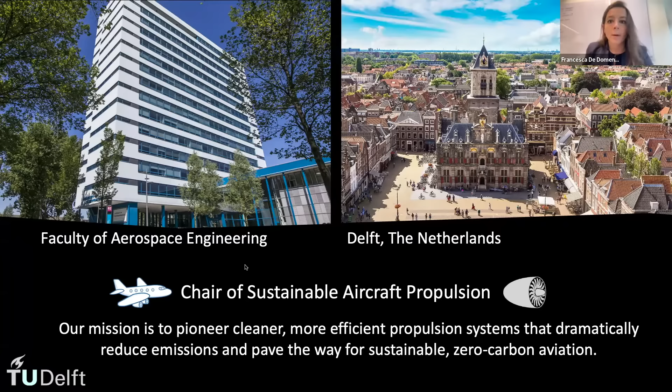Now, I'll give still a bit of background for the background, and I'll dig a bit deeper within net zero emissions in aviation, which is the topic I'm focusing my research on.

Most likely you have seen a similar graph many times. This graph shows the carbon dioxide emissions from flights within the EU+ region, and this is the projection from 2018 to 2050, taken from the report Destination 2050 of EU. What we see here is the goal: for us to get to zero carbon dioxide emissions in 2050. And here are the solutions that are envisioned for the future.

So not only improving technologies, but also operations, sustainable aviation fuels, and hydrogen. Hydrogen, as you can see from this projection, has a very big role in achieving this net zero in aviation. However, as you can see from this graph, we only see hydrogen being added to the picture in the system from 2035. The reason, as most of you already know, and I will further expand during the talk, is really the different properties of hydrogen with respect to what we use today. Nowadays, we mainly fly using kerosene, jet A fuel types, and a very small blend percentage of SAF.

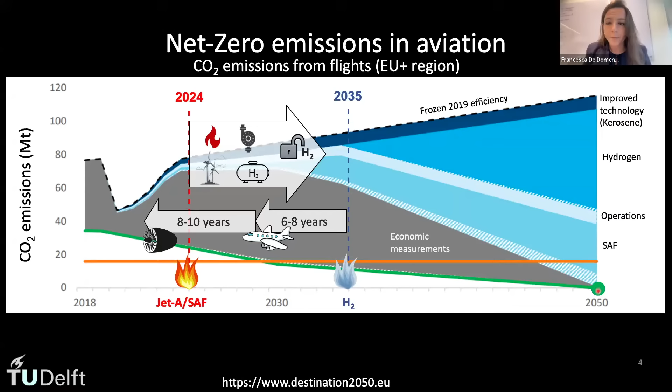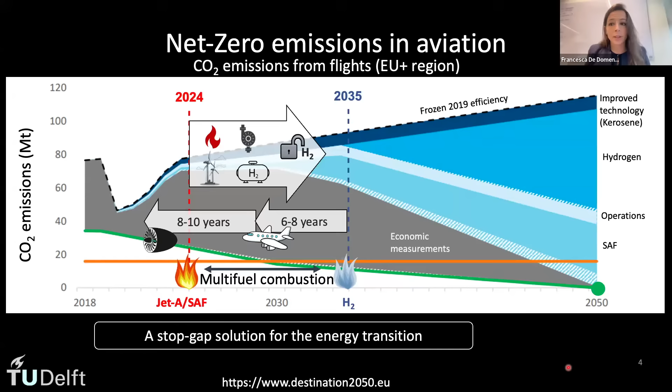One way could be using some stopgap solution, such as multi-fuel combustion. This is the first time I introduce it, and I'd like to explain the concept. The idea of multi-fuel combustion is having a system that synergically uses kerosene as well as hydrogen in order to speed up the introduction of hydrogen within the aviation framework, while we mature our understanding of hydrogen combustion as well as the technologies needed for delivering hydrogen at the airport and carrying it on the airplanes.

Having given this picture, I'd like to provide an outline of the talk. In the first part, I'll go through something some of you might already know, but I'll recap the differences in combustion properties between hydrogen and hydrocarbon fuels.

Then, based on that, I'll introduce the multi-fuel combustion concept and how we are developing it here at TU Delft. In particular, I will present the results of 2 burners that we are using. To be honest, it's the same baseline burner, but this will be clear later on.

So what I will discuss is how we are using multi-fuel combustion here at Delft, how we are developing systems. We started with a multi-fuel methane-hydrogen burner, which we call the APPU burner, and then we retrofit this burner to also include kerosene, within the project HOPE.

Finally, I will discuss the next steps of this research and of this implementation of multi-fuel combustion, and then I will provide some conclusions and outlook.

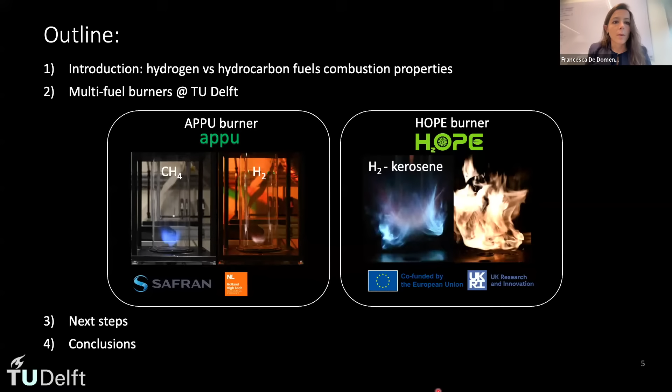Okay, let's start then. Here is a small recap of what I discussed before. How will airplanes look in 2050? This is providing just one possible scenario, because we still need to make the innovations necessary to introduce some of these planes.

So what I want you to take away from this slide is that in 2050, if we want to decarbonize, we will see different shapes and sizes of planes based on the emissions that we will have. Hydrogen most likely has a very big importance in the decarbonization of short to medium range aircraft, while we keep sustainable aviation fuels for the long range.

Another thing I'd like to point out from this scenario is that sustainable aviation fuels are the only ones we could potentially use in current airplanes. But batteries, fuel cells, and hydrogen combustion are still planes that need to be developed. So there's quite a lot of road, discoveries, and technological advancement that needs to be made in order for us to get there.

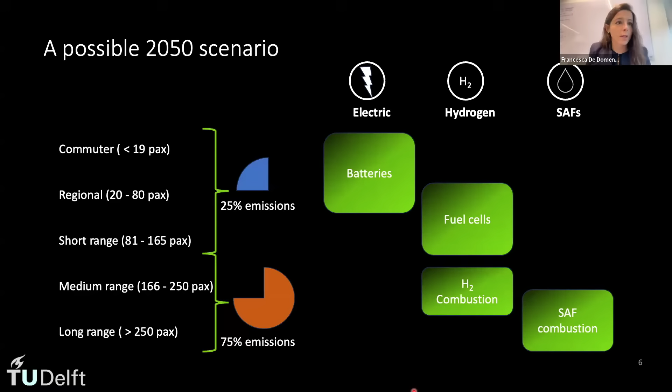So one might wonder, okay, why hydrogen then? Why not just stick with kerosene or sustainable aviation fuels if it's so difficult? But the reason is that we simply cannot just use sustainable aviation fuels for decarbonization. Hydrogen has an enormous potential to decarbonize the aviation system.

First of all, it has zero emission potential and allows for long-term sustainability. It has unique properties, being extremely light and having a very large amount of energy per unit mass. It can be used in a versatile way, in different propulsion systems, and it is available in nature.

This means that as we develop the systems for producing hydrogen, the cost of production will decline, whereas for producing sustainable aviation fuels, there is either not enough feedstock or base material that can be used to make them, or the cost of production is extremely high, so we cannot think of using them to fully decarbonize the entire aviation sector.

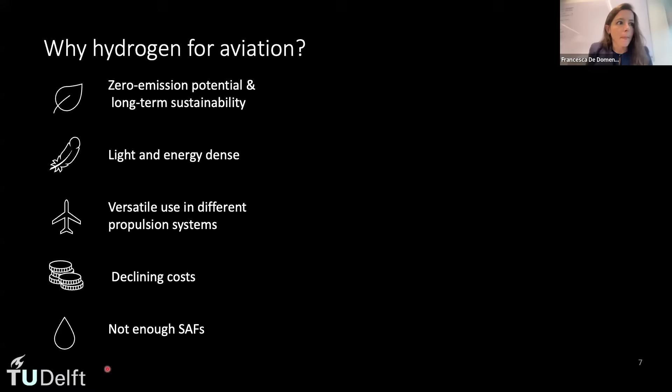So from this, it clearly emerges that hydrogen is really offering a transformative way for aviation. However, there are still big challenges that we need to manage in combustion dynamics, which is what we study, storage, infrastructure, and safety.

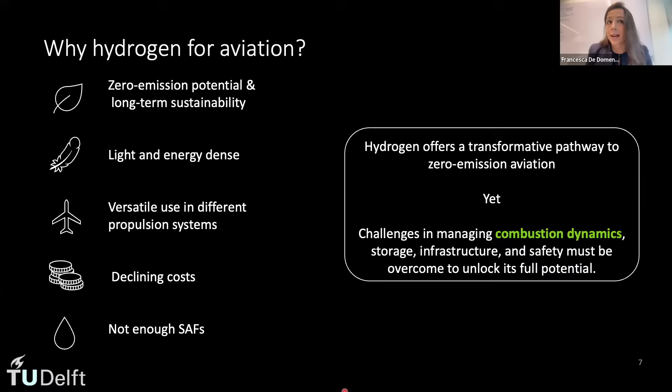Now from the point of view of combustion, hydrogen cannot really be considered a drop-in fuel. In fact, it has very different properties with respect to hydrocarbons. I'll be quick on this since you've probably seen it many times, but it is much lighter with respect to hydrocarbons, both methane and kerosene, has much higher flammability limits, much faster flame speed, and relatively higher adiabatic flame temperature.

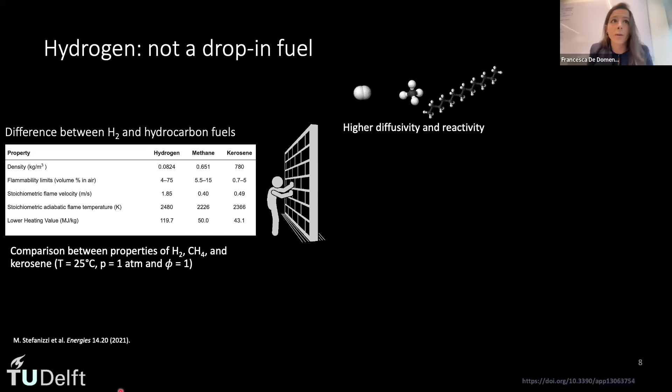This really creates some obstacles because the higher diffusivity and reactivity makes hydrogen flames more prone to flame instabilities. Higher flame speed means a higher risk of flashback, which is detrimental if you think about an aviation engine where you want to be safe 100%.

And also the higher flame temperature might increase the amount of NOx that is produced, which is something we don't want, because we don't want to resolve the CO2 problem and then end up having high NOx problems.

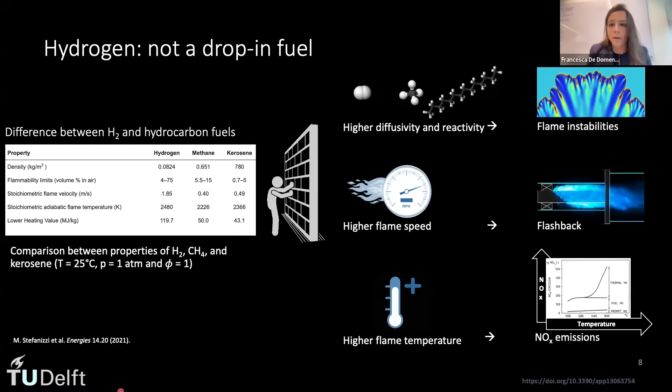So with all of this, we see that there's quite a lot of work for us in order to bring hydrogen within the aviation sector in a suitable way, to have safe, green, and efficient airplanes. Multi-fuel combustion can really act here as a stopgap solution to speed up the introduction of hydrogen within aviation.

In fact, if you can use simultaneously both hydrogen and kerosene, this system would allow you to have more flexibility. It really gives you the flexibility of being able to use both hydrogen and hydrocarbons within various applications.

It has higher adaptability, meaning that you can think about retrofitting the current engines by adding hydrogen lines, rather than fully redeveloping the engine for hydrogen-only solutions.

It will, of course, have the benefits of reducing emissions, not only carbon dioxide but also NOx and soot, as I will show later on. And then it can really ensure security of supply, because you don't rely on hydrogen only, which might not be available at the airport where you land.

And also it's cost effective, because if you're not forced to use 100% hydrogen, at a time when hydrogen cost and infrastructure are still being developed, the use of diverse fuels helps reduce the dependency on expensive or scarce options.

So we really see multi-fuel as a stopgap solution towards zero emissions, which will allow the adoption of hydrogen while supporting decarbonization goals, both for aviation and land-based power applications.

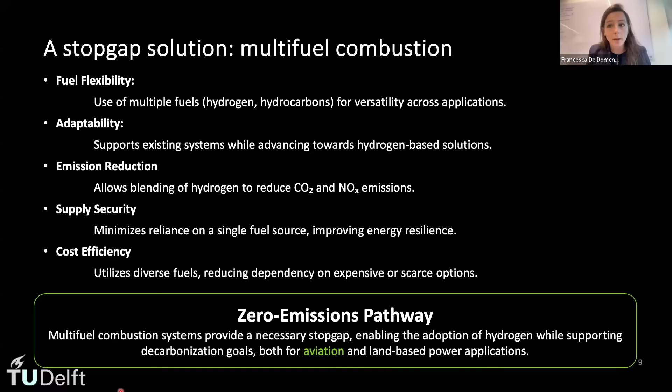So of course there's been some previous work on multi-fuel combustion with hydrogen and kerosene. As I mentioned, we're looking at applications for aviation, and therefore kerosene is the other fuel with which hydrogen would work. But overall, relatively, there hasn't been that much interest, really, because hydrogen was never really put in the picture as a fuel that could be used for aviation.

So if we take a look at the literature and at what was done in previous studies on multi-fuel systems that could work synergistically with hydrogen and kerosene, the first experiment we found is from the 80s, done by Hiroyasu in Japan, who developed a hybrid fuel nozzle that could use liquid kerosene together with gaseous hydrogen, going from 100% hydrogen to 100% kerosene.

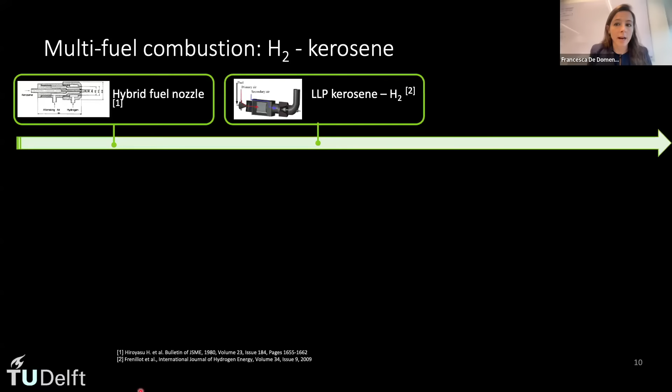Then there have been some studies on lean premix prevaporized kerosene with hydrogen, meaning that kerosene is not sprayed as it would in an aero engine, but is instead prevaporized and then injected into the chamber and mixed with the hydrogen. This, of course, has some benefits, because it means both fuels are gaseous, and the combustion is slightly easier to deal with rather than having two-phase fuels.

And finally, there is also the LEAF burner, which was developed at ETH Zurich, which can run on both hydrogen and kerosene, and with a mixture of the two, but it really requires a design that is not conventional.

So it's a novel combustion concept with a different injection system. While experimental work is quite scarce, there's some work that could be found in terms of CFD simulations studying how hydrogen and kerosene would interact with each other, and also some chemical reactor network studies analyzing the properties of multi-fuel hydrogen-kerosene systems.

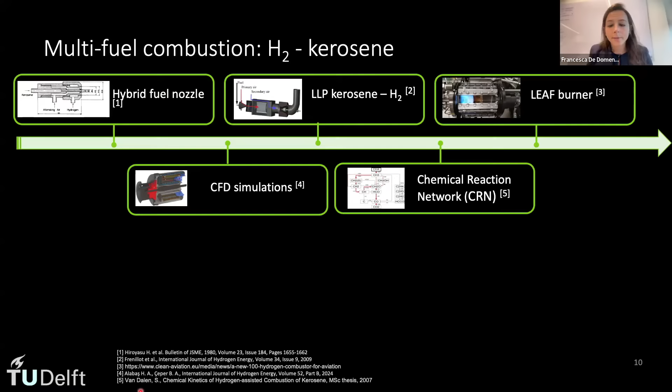And this is all the literature up until 2020. But recently there's quite a bit more interest in multi-fuel combustion, really for the potential that multi-fuel combustion offers as a key enabler for the advent of hydrogen in aviation. Here I listed 3 of the main projects that are now running on this, or that I'm aware of.

There is a Clean Aviation project looking at the introduction of hydrogen within aviation, aiming to develop and test a multi-fuel aircraft engine which Fokker would like to fly by 2035. Fokker is a Dutch-based aircraft company that has pledged to fly a multi-fuel plane by 2035.

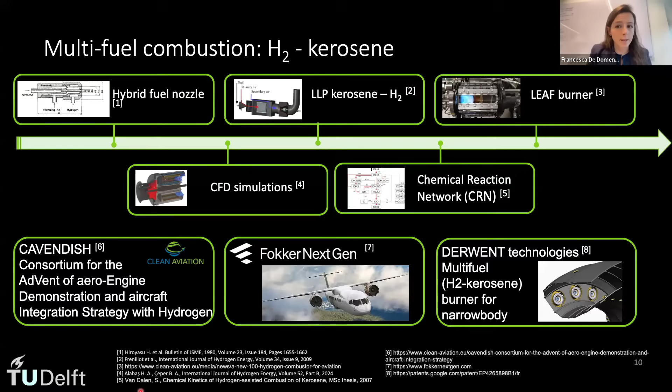And Derwent Technologies is a British-based company which is developing a multi-fuel hydrogen-kerosene burner for narrow body aircraft. This has all happened after 2020, so really recent interest with this concept of multi-fuel combustion.

And within this, I'd really like to highlight the project HOPE we are working on. HOPE is a project we are working on here at TU Delft, and HOPE stands for Hydrogen Optimized Multi-Fuel Propulsion System for Clean and Silent Aircraft.

It's a Horizon Europe project that was funded in 2022, in a call towards a silent and ultra-low local air pollution aircraft. For HOPE, we aim to develop a novel aircraft, a multi-fuel ultra-high bypass ratio turbofan engine. So the multi-fuel aircraft I've been talking about, where the kerosene is stored within the wings and the hydrogen is stored at the tail.

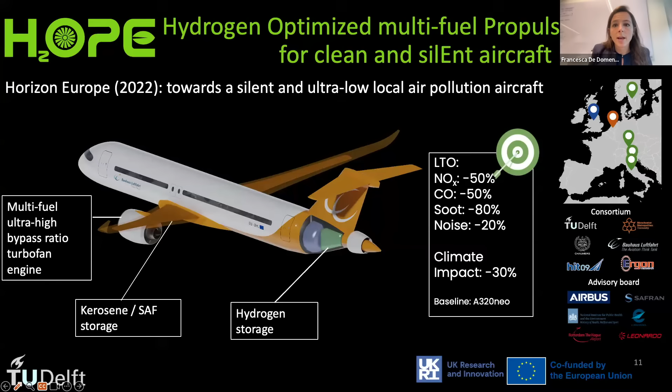It's a European project, TU Delft is leading, and then 5 partners across Europe are collaborating with us within this project. As I mentioned, at TU Delft we are really focusing on the development of the multi-fuel ultra-high bypass ratio turbofan engine, and in particular demonstrating the advantages of multi-fuel combustion in our lab.

Now, before coming into what we are doing, I'd like to provide a bit more context on the advantages of multi-fuel combustion in terms of combustion properties. Previous studies demonstrated that not only do you reduce carbon dioxide, you also reduce CO, soot, and thermoacoustic instabilities. And by adding hydrogen to kerosene, you alter the NOx pathways with the potential for reduction of NOx.

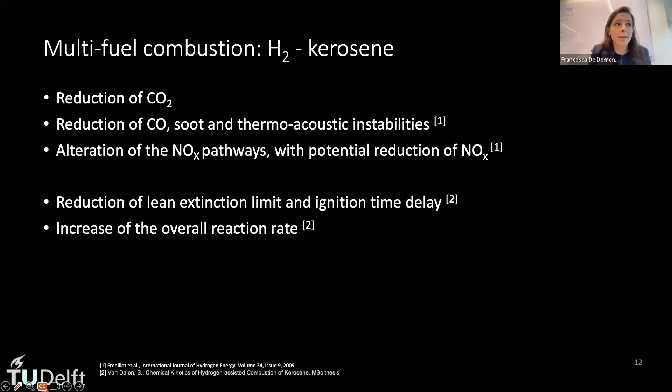Furthermore, you reduce the lean extinction limit and ignition time delay, and also increase the overall reaction rate. And finally, because you don't have to carry all the hydrogen, you also have the benefit of reducing the hydrogen tank size, which is advantageous because it means you don't have to fully change the shape of the airplanes.

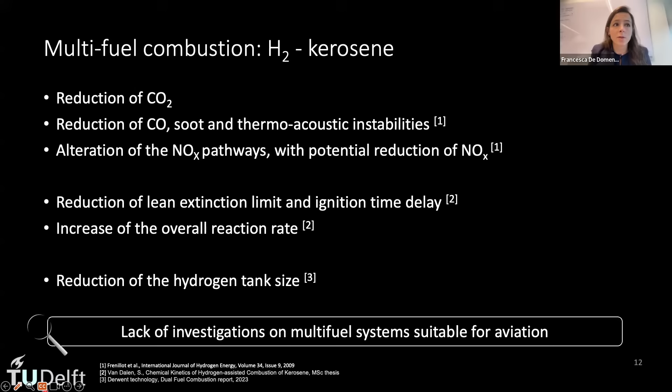But the issue is that while all of this was mainly demonstrated from CFD or chemical reaction network investigations, there is really a lack of experimental investigations on multi-fuel systems suitable for aviation. And that's where really our research comes in.

So our goal is to efficiently combine hydrogen and kerosene to boost performance while minimizing emissions, and we will do this experimentally. We want to develop a system in the lab with which we are able to investigate and understand the dynamics of hydrogen and hydrocarbon blends, advanced diagnostics techniques for multi-fuel combustion - extremely important considering the complexity of the physics and flows involved - and the practical implementation in aviation, to provide a roadmap for introducing such technologies within the aviation sector.

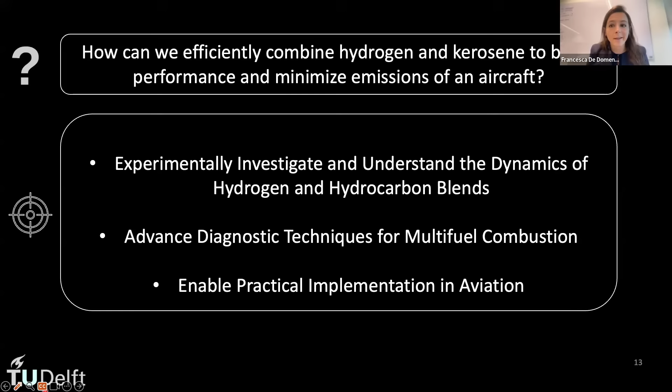Now, after this introduction, I'd like to bring you to the lab and show you how we are tackling the problem with the two burners I discussed previously. I'll start with the swirl-stabilized hydrogen-methane burner, for two reasons: historically, because this is the first swirl-stabilized burner that we tested with hydrogen, but also because this is really the baseline burner that we have modified for the addition of kerosene.

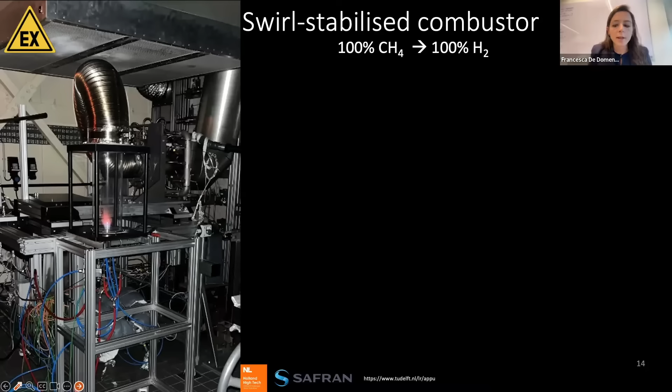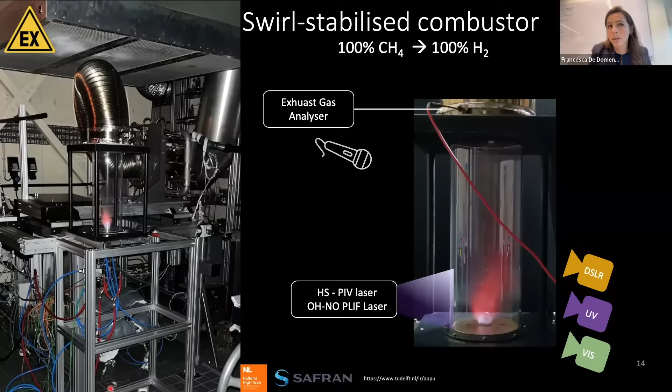As diagnostics that we make on this flame, we have a high-speed PIV, we have OH and NO PLIF, and of course chemiluminescence and visual images of the flame, as well as an exhaust gas analyzer and a far-field microphone to measure the acoustic signature of the system.

Now, a bit more about the injection strategy, because as most of you that work in the lab know, it is very difficult to stabilize both a hydrogen and a methane flame on the same injector, due to the very different flame speed that the two have. So I'd like to show you how we do it in our burner.

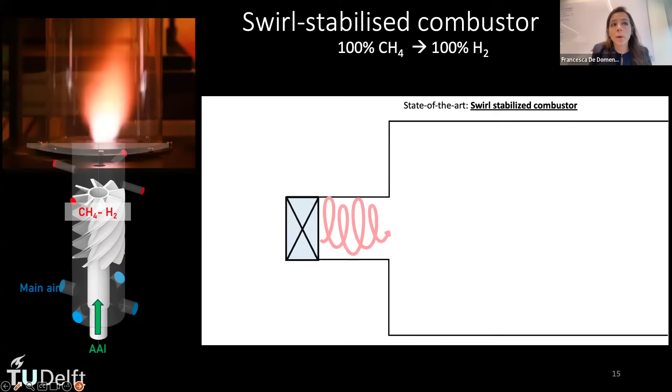First of all, as I mentioned, this is a swirl stabilized combustor. We have an axial swirler feeding into the combustion chamber. What happens is that if you have a sufficiently high swirl number, you generate a flow pattern with an inner recirculation zone here, and two outer recirculations, a toroidal outer recirculation zone on the side, with a stagnation point here.

In our case, the system is practically, or technically, premixed, meaning that we do not have fuel and oxidizer mixing in the swirler, but for safety reasons we try to inject fuel as late as possible, but early enough to still have a decent level of mixedness of the fuel within the combustion chamber.

Therefore, we inject the fuel right downstream of the swirler, as you can see here, and it corresponds to these four injection ports here on the swirler design.

If it was a methane flame, the methane flame would nicely sit and stabilize there, as you see it here. So most likely we would not encounter problems of flashback in most cases. However, what happens with hydrogen is that, because it has a much higher laminar burning velocity, most likely the flame would flash back within the injector.

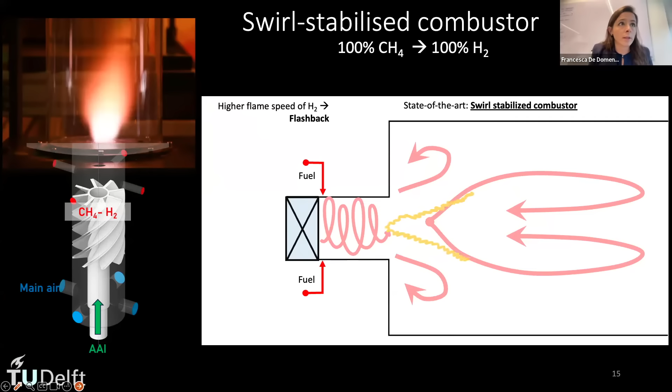In order to avoid the flashback, we use the concept of axial air injection that was introduced in 2015 at TU Berlin, which means there is a central jet of axial air injection used to compensate the velocity deficit generated by the high burning velocity of the hydrogen.

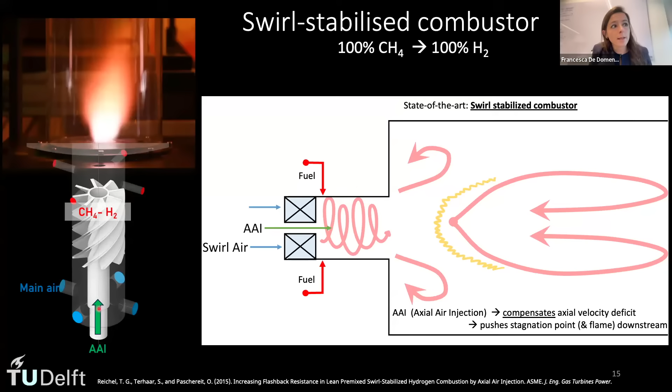This axial air injection manages to push the flame downstream and stabilize the hydrogen flames, avoiding flashback. This corresponds to the central jet of air here that you see in the injector.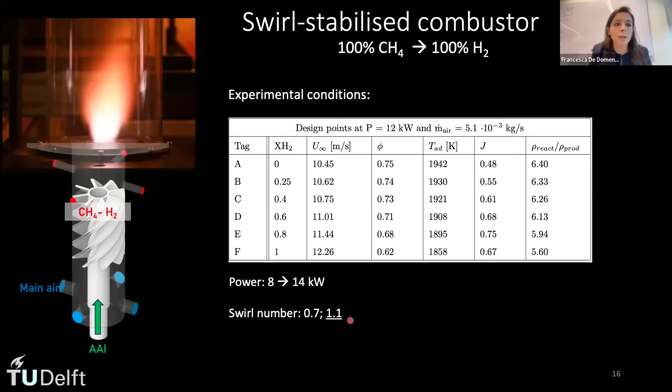In terms of power, within our analysis we mainly tested the burner from 8 to 14 kilowatts, and we have two swirlers with two different swirl numbers. But for the results I'm going to show now, the swirl number we use is the one with swirl number 1.1.

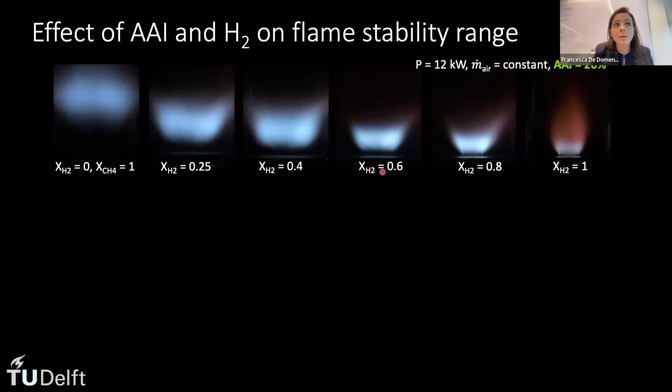Now here's how the flame looks going from 100% methane, this flame here, to 100% hydrogen, which is the flame here. As you can expect from my previous description, and because of the much faster laminar flame speed of hydrogen, you see that the flame gets closer. The more hydrogen we add, the closer the flame gets to the injector and the more compact it gets.

If we take a look at the stability map of this burner, we see that the axial air injection helps us achieve continuous operation from 100% methane, represented here in this stability map, to 100% hydrogen, here. While instead, if we do not use axial air injection, as anticipated, it is not possible to achieve stable combustion from 100% methane to 100% hydrogen, but at equivalence ratio 0.6, the multi-fuel flame starts to flash back.

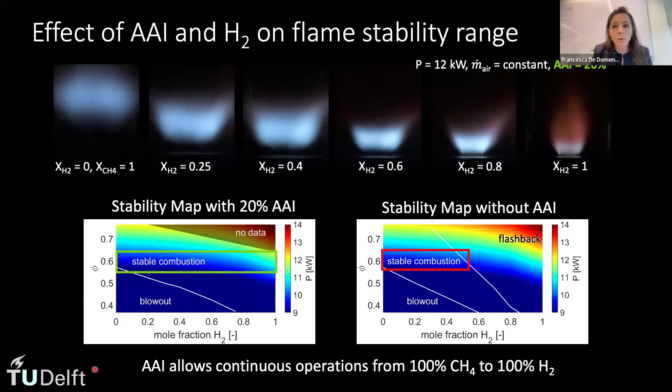This is a big advantage, being able to use the same injector burner for two different flames with two different fuels. But of course, this has some drawbacks, which can be seen in the OH star chemiluminescence data and high-speed PIV data that were taken.

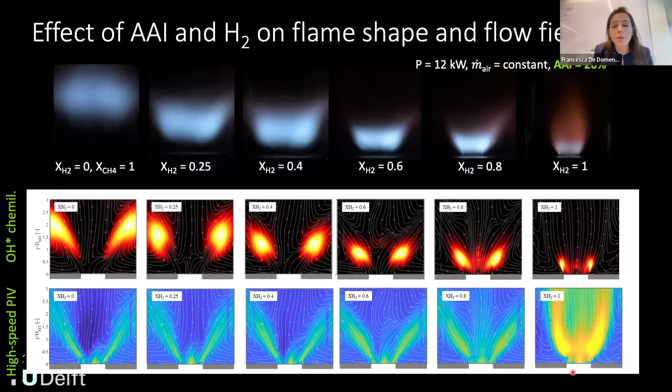Without going into all the cases, I'd like to point out that from the streamlines, you can see the flame at 100% methane has the nicest swirl structure you'd expect, with an outer recirculation zone and an inner recirculation zone. But the more hydrogen we add, the more we start losing the inner recirculation zone, until at 80% hydrogen we no longer have it, and at 100% hydrogen the flame is mainly behaving as a jet flame, not as a swirl stabilized flame. So we keep the outer recirculation zone, but we miss the inner recirculation zone within this system.

If we take a look at the two extreme cases, 100% methane without axial air injection shows a nice swirling flame, both from the PLIF images and the PIV. Instead, with 100% hydrogen, the flame, as anticipated, has more the shape of a jet flame rather than a nicely swirl stabilized flame.

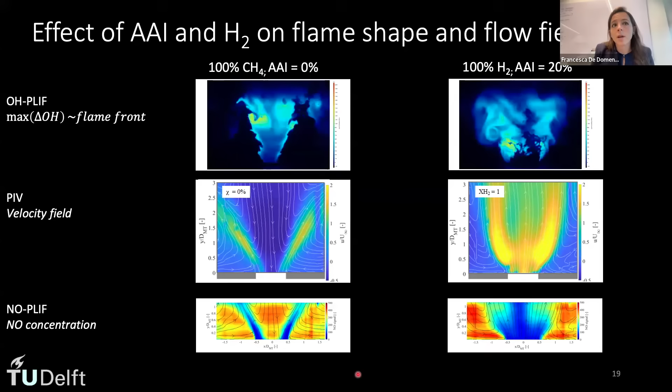What we also see is that the NOx, one of the main issues with hydrogen, is very different. For the methane flame, we have, as expected, production of NOx in both the inner and outer recirculation zones. For the hydrogen flames, the inner recirculation zone is not there anymore, but we have a much higher production in the outer recirculation zone.

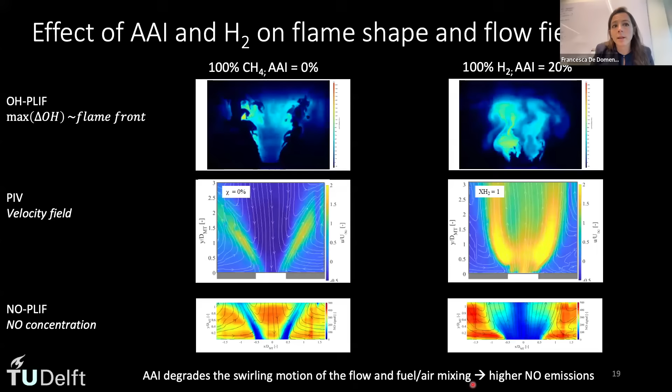So overall, if we take a look at a scan, we can say that axial air injection degrades the swirling motion of the flow and the fuel-air mixing, which eventually results in higher NOx emissions, as we can see here.

If we take measurements from the exhaust gas analyzer, we see that by increasing the hydrogen mole fraction, the amount of carbon dioxide reduces until we don't have it anymore at zero methane in the mixture. However, the NO measured by the gas analyzer tends to increase, which is of course something we don't want.

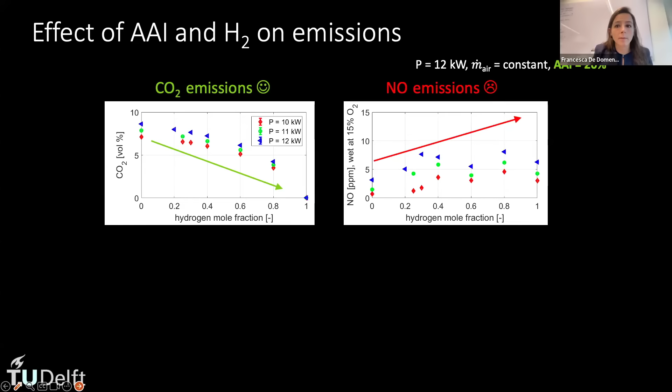However, from these results, particularly the exhaust gas analyzer, we cannot capture very well how both the axial air injection and hydrogen addition are acting on NOx emissions, because these are two different phenomena. The first is a non-swirling flow within the swirler, and the other is the addition of hydrogen, which burns at much higher temperature, making the system more prone to producing thermal NOx.

So what we did was go to the lab and run three campaigns to look at the effects of both axial air injection and hydrogen on the NOx emissions of the burner. In the first test, we kept all quantities constant and only increased the axial air injection in the system.

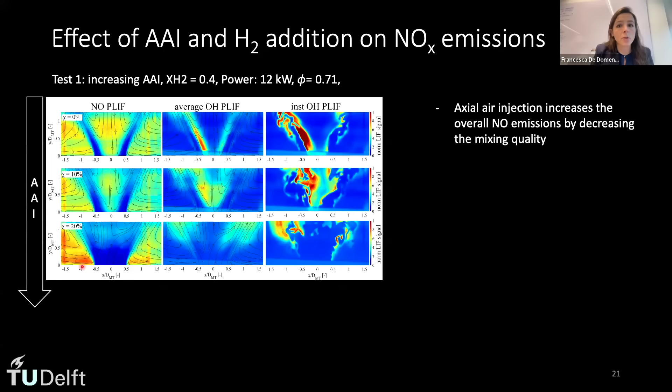You can see here the NO PLIF and OH PLIF results from the burner. By increasing the axial air injection from 0% to 20%, we start seeing a higher production of NO in the outer recirculation zone. This tells us that axial air injection increases overall NO emissions by decreasing the mixing quality, meaning the fuel and oxidizer mix worse within the mixing tube, which corresponds to a higher NOx level produced by the burner.

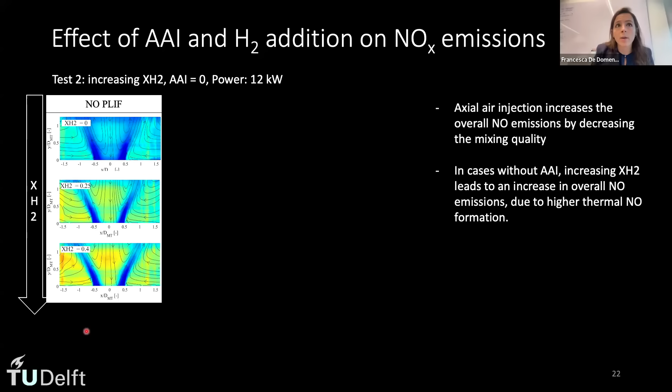The second test was increasing the hydrogen content while keeping the power and axial air injection constant. Here we have flames with 0%, 25%, and 40% hydrogen, without axial air injection. We can see that, as expected, increasing the hydrogen percentage leads to an increase in overall NO, mainly due to the higher thermal NO produced.

The final test involved again increasing the percentage of hydrogen, but this time with axial air injection at 20%. We see a bit of nonlinear behavior here, with 40%, 60%, and 80% hydrogen. Overall, the amount of NO produced at 80% hydrogen is higher than the amount produced at 100% hydrogen.

Initially this was a bit puzzling, but I think we can understand it if we look at the cases here. Going back to the test matrix, in the case of 80% hydrogen we were at an equivalence ratio of 0.68. In the case with 100% hydrogen, we have an equivalence ratio of 0.62. If we look at the NO emissions in this graph, it's not exactly the same conditions, but I think it can still be used to explain this.

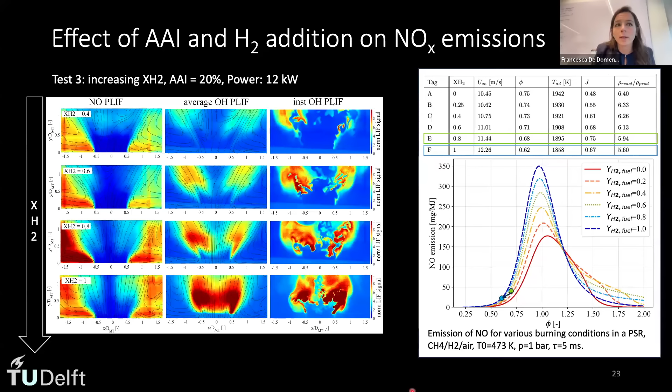We are not yet in a region where the production of thermal NOx is that high. Therefore, this drastic drop in equivalence ratio between the two cases is really creating this big change in the NO that is produced.

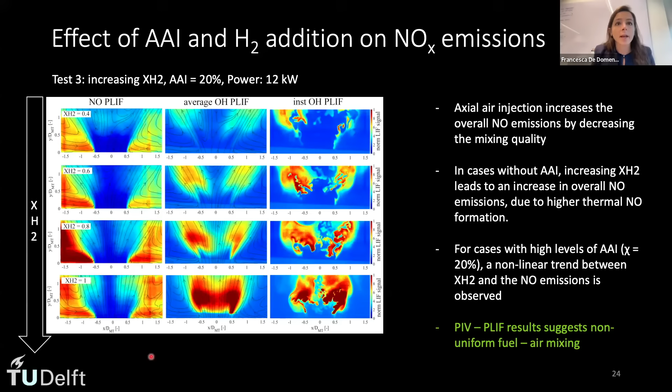So the main takeaway from these results is that, as expected, a system that is partially premixed or technically premixed might not have good mixing. In particular, axial air injection requires further investigation of the dynamics of mixing in the mixing tube, in order to improve the mixing of fuel and air and obtain a uniform fuel distribution.

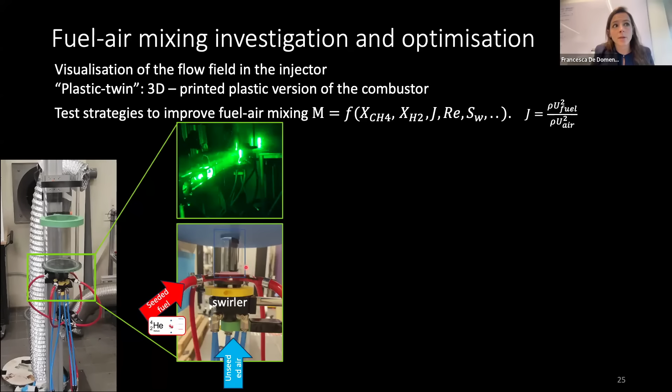To investigate this, I'll be brief, but I'd like to point out that we are doing some non-reacting experiments in what we call a plastic twin of our rig — a 3D printed version where we can change most of the parameters of the injection system quite quickly. Basically, we are taking a look at the mixing in the mixing tube. We now have a transparent mixing tube, this small rectangle you see here, less than 4 centimeters, so quite small.

We are looking at how the hydrogen and air mix. In this case we don't use hydrogen, but helium instead. Here are some results we get — for the sake of time I won't go into too much detail, but these particles represent the seeded part, which represents the fuel, and the unseeded part represents the air. We can see that within this configuration, and also from the LES, we do not have very good mixing of the fuel and oxidizer.

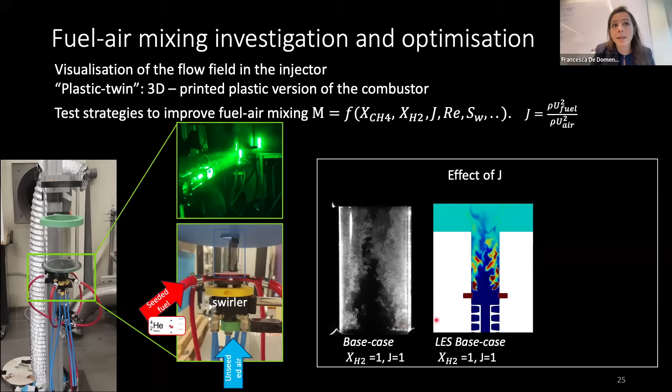But if instead we improve the design, and in particular in this case improve the momentum of injection of the fuel with respect to the air, then we can have much more uniform and better mixing of the fuel and oxidizer within the mixing tube. Now, from this non-reactive experiment, we'd like to go into the lab and test whether that's actually the case.

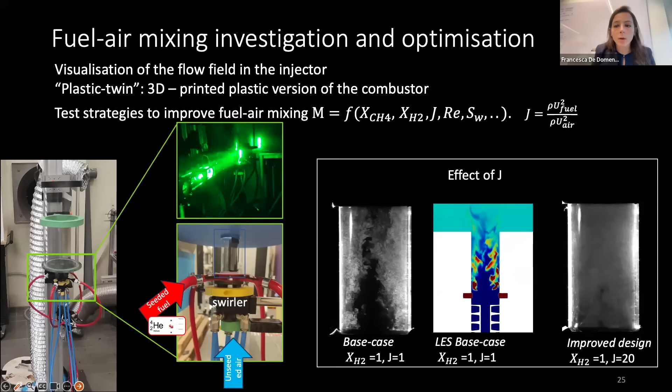This concludes the further development for the methane-hydrogen experiment. Now I'd like to move to the real core work for the aviation system — the kerosene addition to this setup, what we call hydrogen-sustained combustion of kerosene, which is really the goal of Project HOPE.

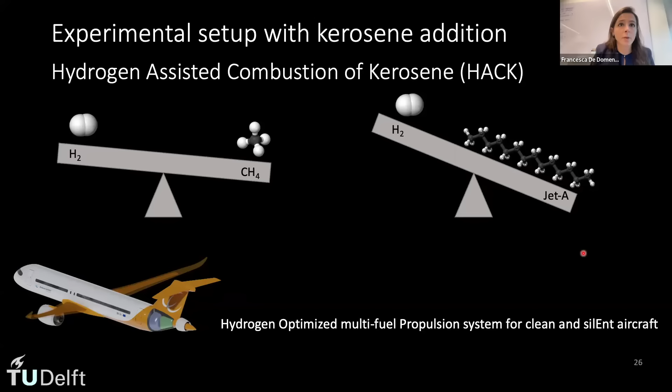We are talking about something quite different, because while hydrogen and methane are different, they are still both in gaseous form and not that different from one another. But when we start talking about hydrogen and kerosene, there's a big difference — not only in volume, but mainly in the fact that we are dealing with a liquid system, the kerosene spray, and a gaseous system, the hydrogen.

To develop this system, we are proceeding with a simultaneous experimental and CFD-based scouting for the design of this multi-fuel kerosene-hydrogen atmospheric burner. Since we're doing this with numerical specialists, we were strongly advised to use pressure-based atomizers — simplex atomizers for the kerosene we want to spray within the system. Here are the results for the three injection configurations we considered, keeping the hydrogen burner, discussed earlier, as baseline.

As I mentioned, there are 3 injection configurations of the kerosene that we are considering. The first injection configuration leaves the hydrogen injector as it is, and adds 2 kerosene sprays on the base plate, far from the mixing tube, as far as we could fit them within the plate.

The second injection configuration we looked at was to spray the kerosene in the mixing tube, downstream after the hydrogen.

The third injection configuration we consider is a full redesign of the system, where we remove the auxiliary injection channel but add the kerosene sprayed at the center, while the hydrogen is still injected on the side of the swirler. So it's a full redesign.

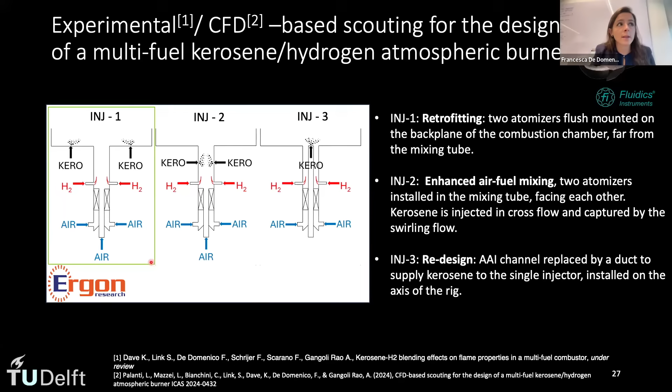To start with, because we are working together with this company in Italy, Ergon, which is doing the CFD scouting for this project, we decided to start testing injection configuration 1 because it allowed us to just retrofit the burner that we had. So if you remember, this is the design of the hydrogen burner that we had.

And here's how the burner looks like when we put the 2 kerosene injectors on the side. The reason we have 2 is because of power split constraints—we could not go to lower flow rates in the injector to allow for 4, so we could only use 2 of those. That's how the first experiment on this system looks like.

So we started looking at the flame and taking sound measurements with a far field microphone.

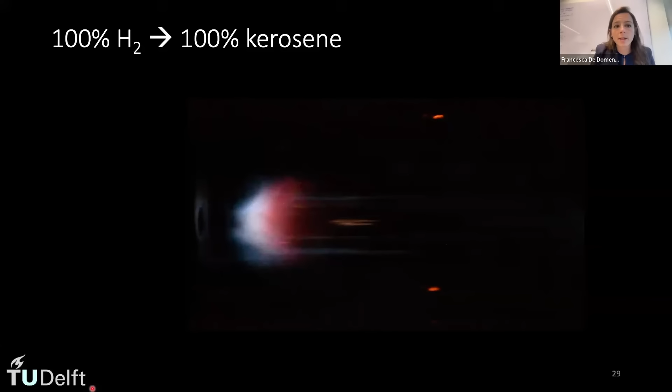Here I have a video that shows the transition of the flame from the 100% hydrogen flame, which is the one you saw before, to the 100% kerosene flame, which you haven't seen yet, at a power of 9 kilowatts.

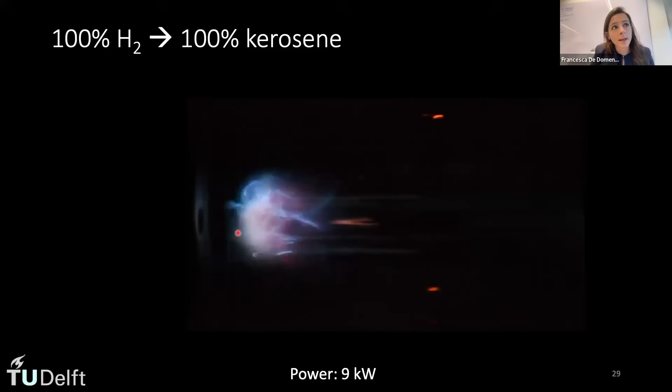From the video, you see that we start adding the kerosene, and slowly you see more and more strips of kerosene starting to get burnt, up until clearly you start having all the kerosene flames, because in the meantime we have dropped the hydrogen content. So to clarify, in this video we start from the hydrogen flame, and at the end we get to the 100% kerosene flame, and you saw the whole transition.

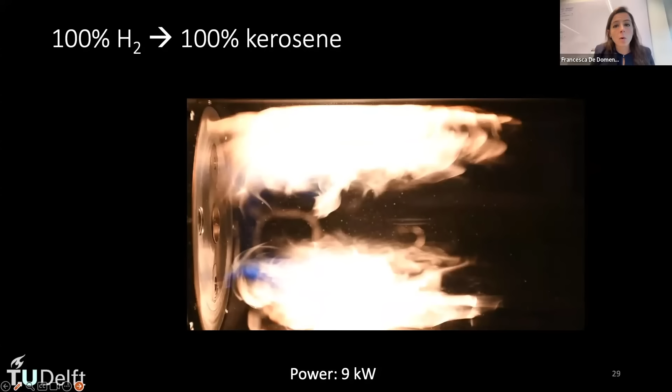Rather than going in transient, we can take a look at the steady state, where we have these 5 flames for different power splits. This flame here is the 100% hydrogen you saw before. This flame here is the 100% kerosene that, with the 2 spray injectors, results in these 2 lobed flames.

And then the flames in between are the ones we're calling by the power split between hydrogen and kerosene, all at a power of 9 kilowatts and a nominal equivalence ratio of 0.4.

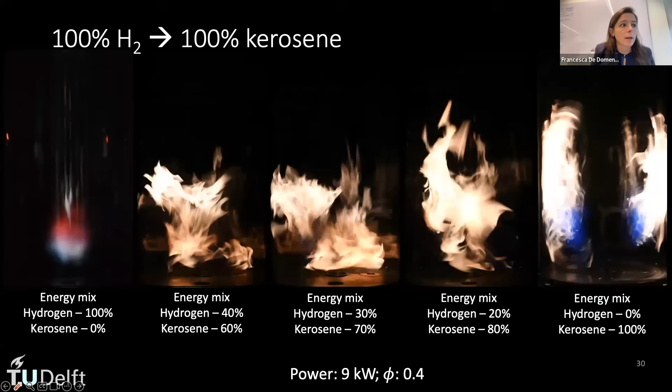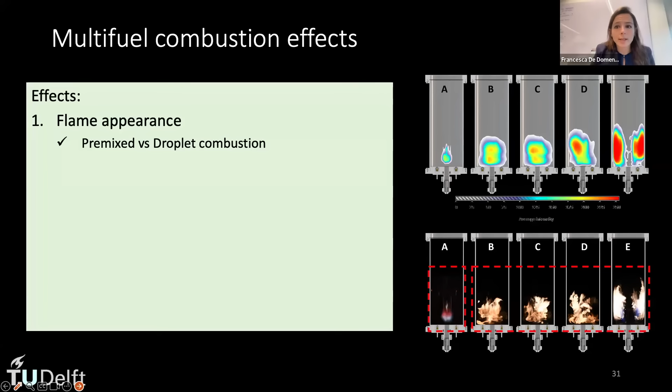If we want to take a look at this data, what is it telling us? Of course, the flame is very different. When we have hydrogen, we don't have droplet combustion. When we have kerosene, we start seeing the effect of the droplets, and the flame topology changes quite a bit by adding kerosene. The flame gets larger and larger until it starts having these 2 lobes here.

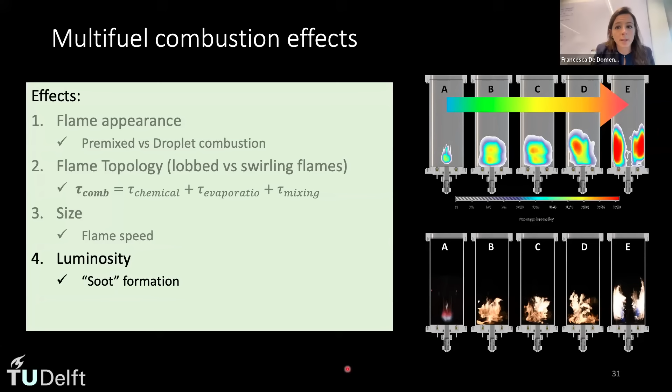This can be explained by looking at the combination of timescales—chemical timescale, evaporation timescale, and mixing timescale. Also, the size of the flame is different, which could be directly related to the different flame speeds within hydrogen and kerosene. And we also see soot formation within the system from one to the other.

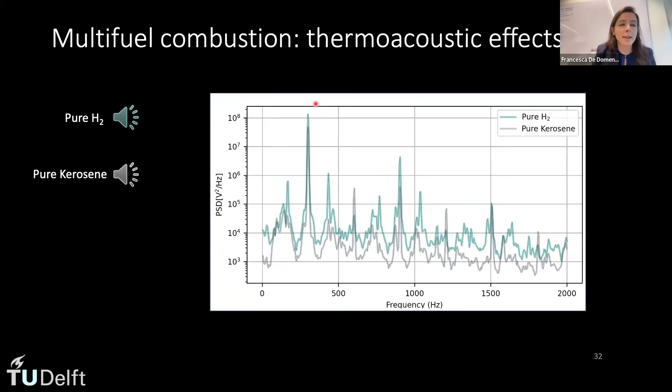Finally, another effect we observed—I could play the sound but I will not, because I think it's quite unpleasant—is that with the pure hydrogen and pure kerosene case, we see a tone of 300 Hertz appearing, and this 300 Hertz really corresponds to the natural frequency of the chamber. So both the hydrogen and the kerosene flames are exciting the natural frequency of the chamber.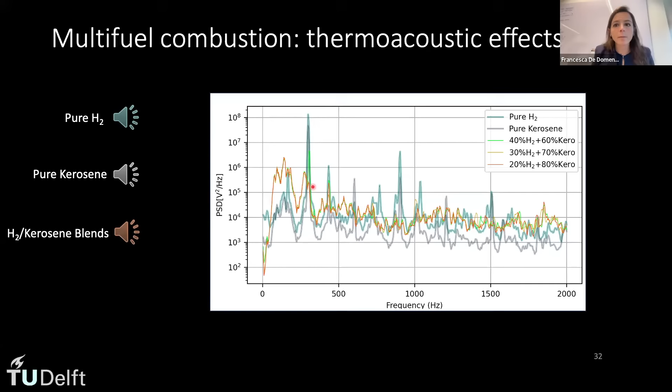But when we start having hydrogen-kerosene blends, we see that the effect of multi-fuel really reduces the height of this peak, and therefore reduces this strong tonal noise—I'm not sure if it's really a thermoacoustic oscillation—that was observed before.

Now, of course, with this flame, we know it doesn't really look like a practical system one can put in aero engines. Nevertheless, it really helped us provide Ergon with a good test case to test their model.

They are using RANS, a K omega shear stress transport, and eddy dissipation concept based on a partially stirred reactor to model the multi-fuel hydrogen kerosene system. And here you can see that even by using RANS, they were quite able to capture the average heat release rate and overall the flame shape across the various cases, from 100% hydrogen to 100% kerosene.

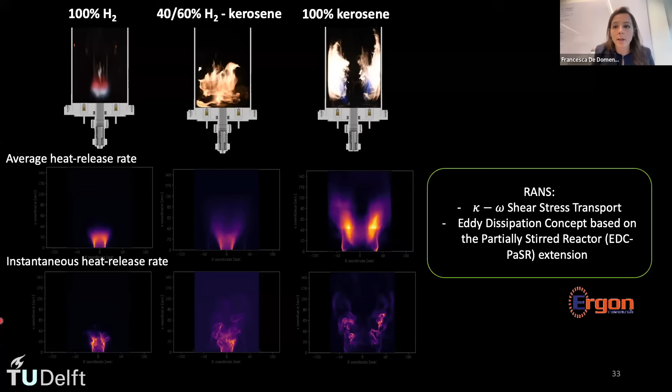As a reminder, what we're trying to do here is develop a system suitable for multi-fuel combustion of hydrogen and kerosene, and therefore the use of RANS is good for scouting and analyzing several conditions quickly, rather than going to more computationally heavy simulations, which require way more resources and computational time.

So going back to this idea of scouting, this is the injector we just tested, and we can see the three cases: the kerosene only case, the multi-fuel case with hydrogen and kerosene, and the hydrogen only case, showing the velocity and temperature fields. This really matches very well with what we saw in the experiment.

Meaning that in this configuration, we do not really obtain a uniform distribution of the fuel. The time for evaporation and mixing of the kerosene is not sufficient, and therefore there's formation of fuel-rich spots in the kerosene flame, which eventually leads to high levels of NOx.

However, at the moment in which, with the same computational infrastructure, our colleagues at Ergon tested the injector, we see a very different flame, both by looking at the velocity fields and at the temperature field.

And what we see is that the kerosene only, multi-fuel, and hydrogen only cases really do not differ that much in terms of the velocity field or the temperature field, which is something we are seeking, meaning to have a system that produces flames with hydrogen, kerosene, or in between that are as similar as possible to one another.

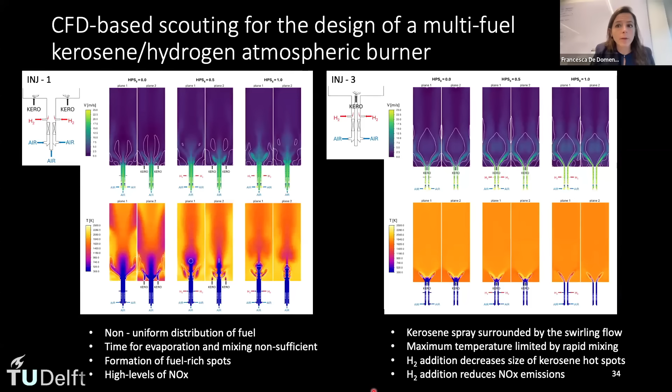So we see from the RANS that the kerosene plume is surrounded very well by the swirling flow. There are less peaks of high temperature, so there are really little high temperature zones, while instead with the previous injector that we tested, there are much higher, much bigger peaks of hot temperatures.

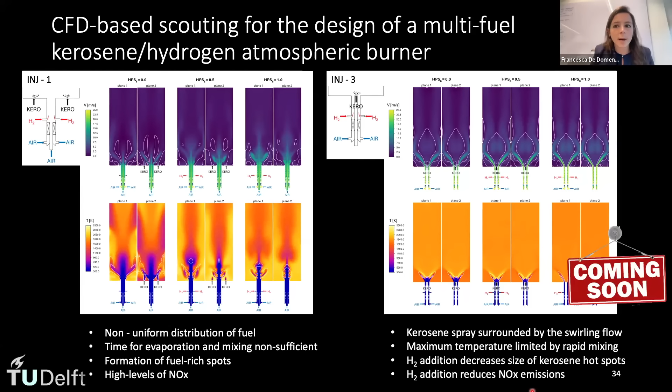Also, we see that the hydrogen addition is decreasing the size of the kerosene's hotspots. Overall, from the RANS, we see that the hydrogen addition is reducing the NOx emissions. This was only done by RANS, and now we are really about to start testing this concept in the lab. I hope that soon positive results will come that corroborate what was observed numerically.

Finally, I'd like to share something about what else we are doing and what are the next steps for this work. So first of all, of course, there is diagnostic development for these systems.

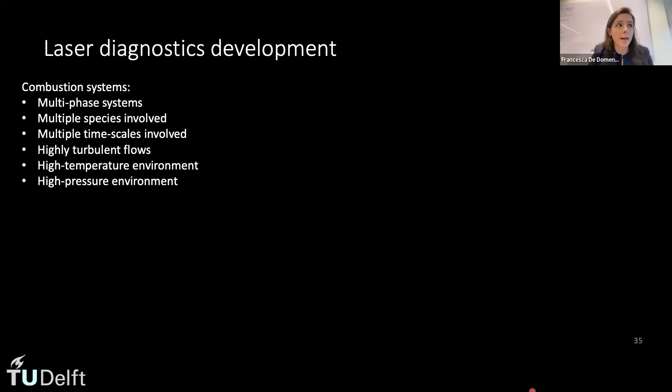We have a system that is complex because it's multi-phase, multiple species are involved, and multiple timescales. Flows are highly turbulent, and we are looking at high temperature and eventually high pressure environments. So of course, we want to measure velocity fields, but also scalar fields.

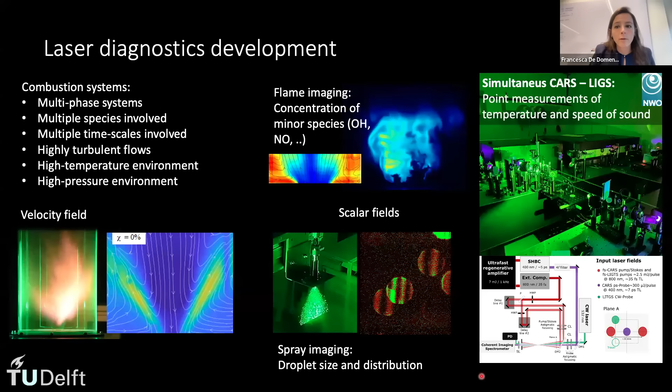And beyond the OH and NO measurements you saw within these slides, we are also working on developing spray imaging for the droplet part of the multi-fuel combustor to look at size and distribution. We are also interested in developing CARS and LIGS for simultaneous temperature and speed of sound measurement for the temperature map of the combustors.

Briefly, what's next then for this project? So now we are working on improving the injector. Then we aim to go to high power. This is preliminary testing of a burner that we aim to bring to 100 kilowatts.

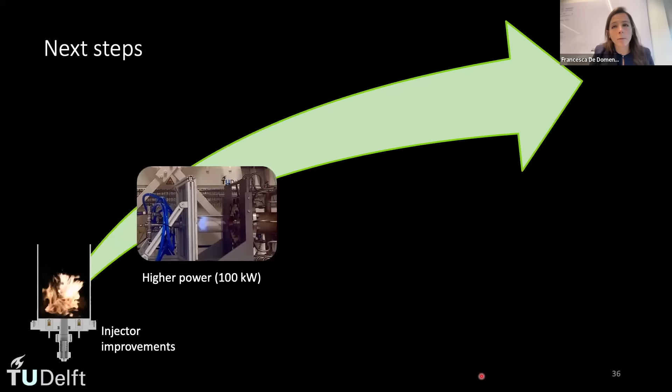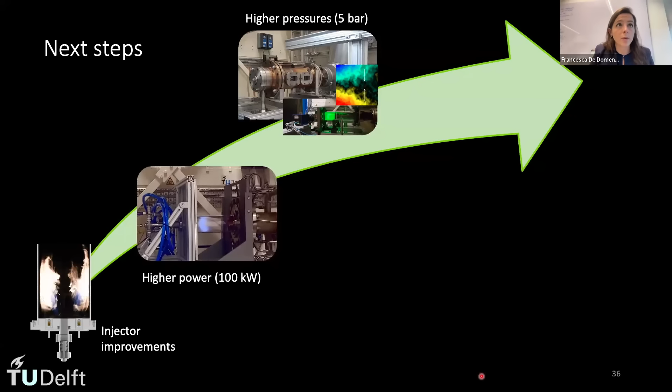And also we are working on developing a small pressurized vessel that could go up to 5 bar, in which we could test what happens at pressure to this system. With the hope that finally we'll be able to see such a system flying within a novel multi-fuel hydrogen aircraft.

So to conclude, I strongly believe that hydrogen can drive a paradigm shift in combustion, offering a unique opportunity to rethink and innovate within our combustion systems. But in order to unlock its full potential, we still need further knowledge of the combustion properties to ensure that it's safe and effective to use.

So in order to close the gap, we can use multi-fuel combustion systems, which can enable a practical and flexible pathway to decarbonize the energy sector.

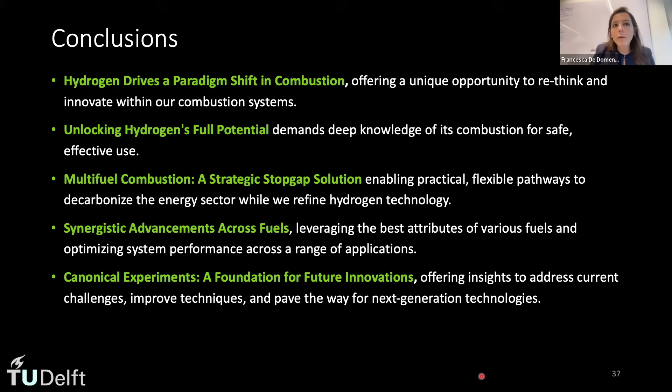And beyond that, synergically using various fuels can really help leverage the best attributes of the various fuels and optimize the system's performance across the various range of applications. And because we are really working on redeveloping the combustion system, a canonical experiment, a lab experiment, really offers the possibility of developing and testing novel solutions for future innovations, and can offer insights and address current challenges.

To conclude, I'd like to acknowledge all the people that worked on this experiment. Of course, experiments take a lot of time and effort from everyone. So there's a really big group of people that have been working within the combustion chair, not only academics, but also technical staff, PhDs, postdocs, and master students. The main names are the PhDs and master students who worked on the various experiments: Lorenzo Palanti and Lorenzo Massei from Ergon, and Professor Arvind Gangoli Rao, who is the chair of Sustainable Aircraft Propulsion, and has been very much involved, bringing in many ideas within these projects. With this I conclude, and I thank you for your attention and for the opportunity to share our work.